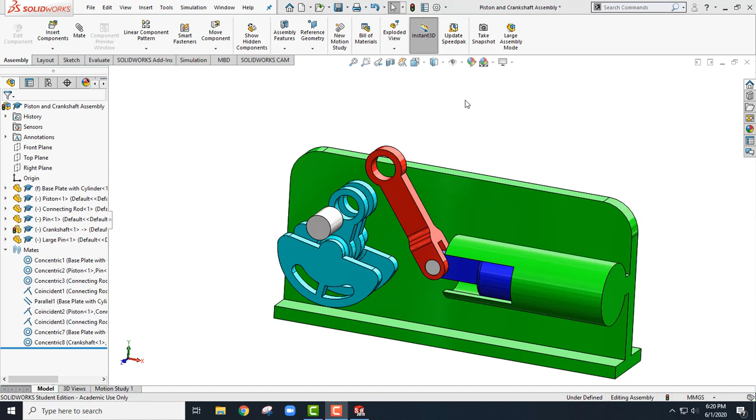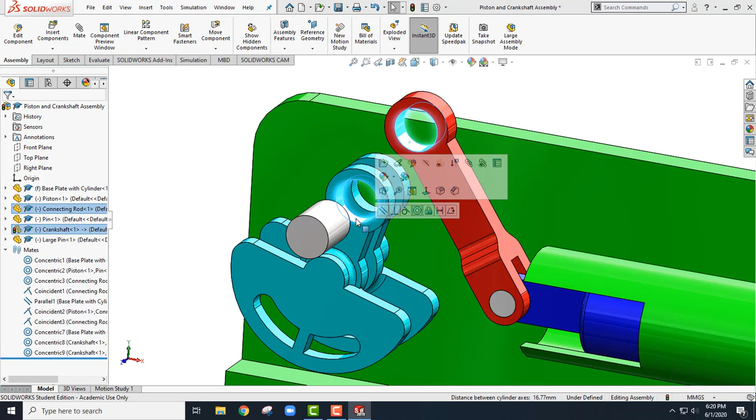First, when you're setting your mates up, don't forget that you're going to click on surfaces and then choose the surface. For example, here to make sure this is going to be concentric, make it concentric. Next, let me try this one here and this one, make these concentric. I click on this face and on this face and make these coincident. Okay, so that's set up.

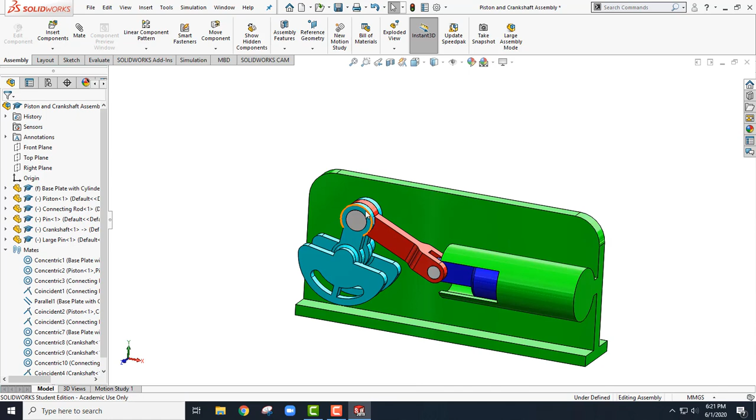And now this little part here works as a piston and crankshaft and connecting rod. So what if I want to have this be an exploded view? Now I have everything connected, it's moving the way I want it to, and I want to show an exploded view, which I'd like you to do. To do that, you create a set of steps to take it apart. Think about how it would come apart if you're going to take it apart. So click on exploded view first here, and then one thing at a time.

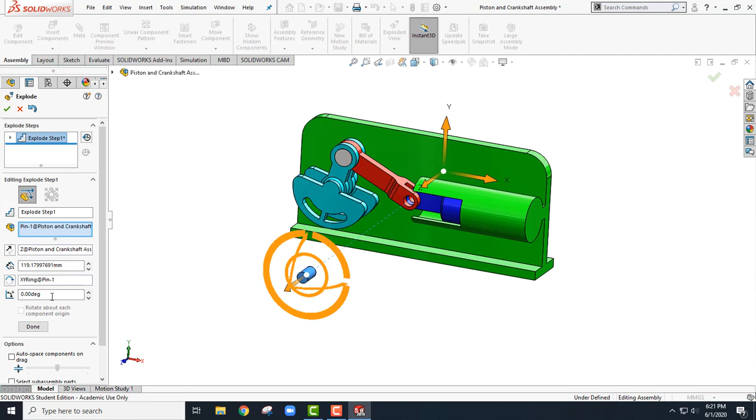If I was going to take this apart, I would take out the pins first. I'm going to click on this pin and pull it out to here. When you get it where you want it to be, just click on done. That's the first step, explode step 1. Next is this pin, I'll take this out to here. This is explode step 2, done.

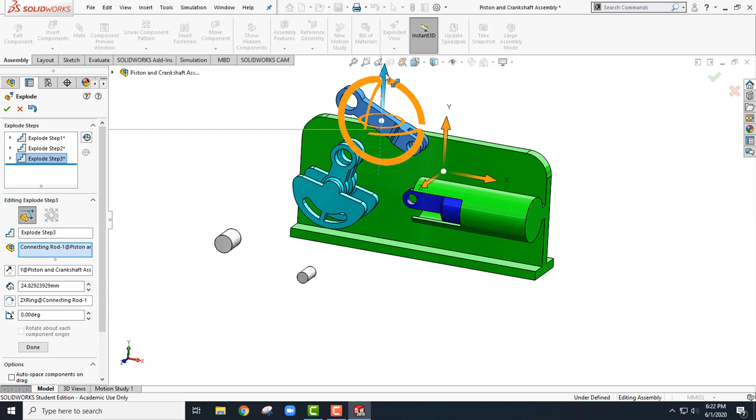And these are temporary movements, you're not doing this permanently. I would bring this up, probably click on this one and bring it up out of the way. A little higher, there it is, and that's done. I'm going to bring this one out this way to there, and that's done, and then pull out the piston.

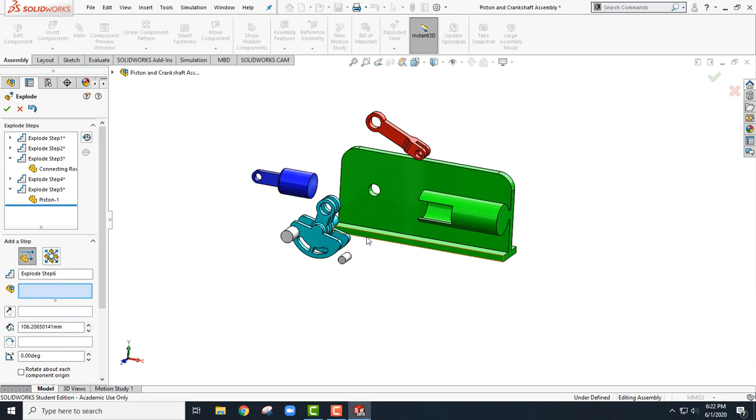Like this. Whoops, wrong one. I'm going to right click and delete that, click on this one instead and pull it out and see if that works. Okay, that's done. Alright, when that's finished, now I want to save this. If I click on exploded view again, it goes back to where it was, so don't worry about that.

But then you've saved the exploded view. So if you go to Configuration Manager here, notice that if you click on this arrow, there's exploded view 1. Right click on this and say Animate Explode. And now it shows the animation of what you've done.

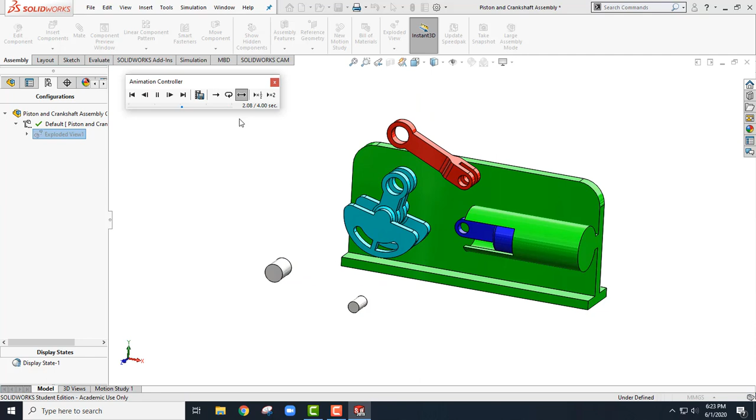Here's your animation controller. You can make it be in a playback loop, click on play and try things with this, and it'll just keep going through doing the motions. You can click on reciprocate so it goes reverse, back and forth. You can change the speed here by half or increase it by 2, things like that.

When you're ready, however you want to do it, I'm going to click on normal here and I'm going to record this now. Let me bring it back to here and I'm going to click on record.

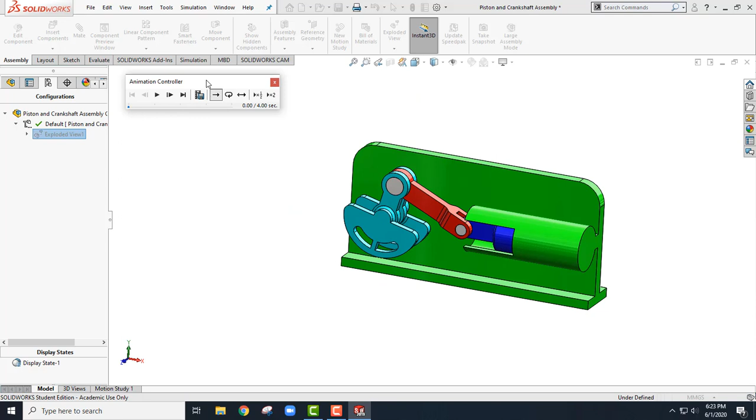So a few things about the recording: save it in a safe spot in your folder with the assembly. Don't use an AVI file, use an MP4 video file. That's what you would use for YouTube videos and just generally for your computer. That'll run on your PC at least. So use MP4, give it a name if you need to, and then save it, and it'll go through.

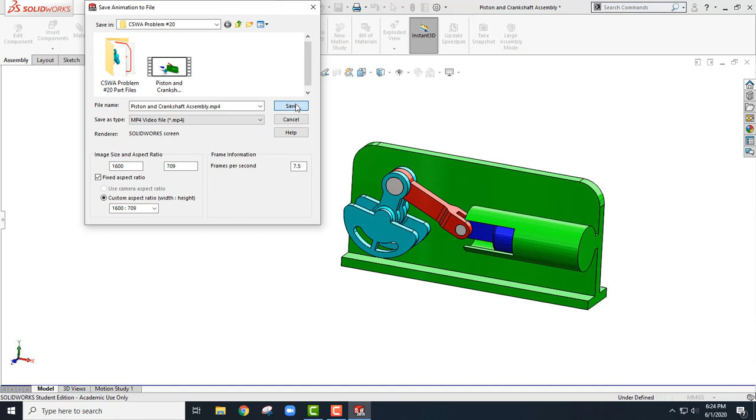And run the animation, and it'll save it. When you're finished, you can close that. Bring this back over, let me see if I can find it here. I'm just going to go to Quick Access. Okay, so I found it, here it is. I saved it right there. So this is the little video now of this animation.

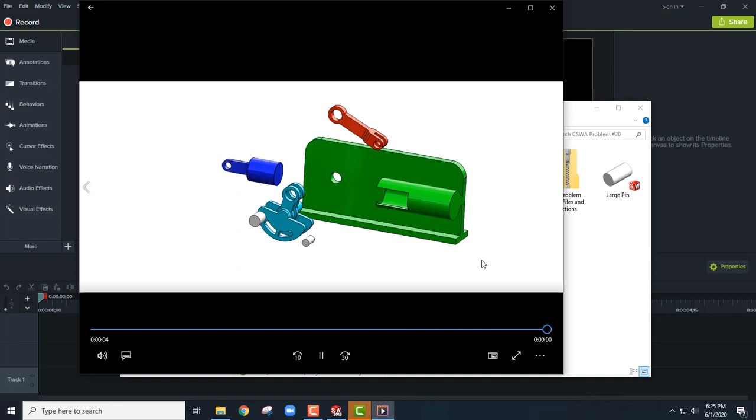It's a little not super exciting, but that's the idea. You can kind of play with that and use that. That's about it, hopefully this helps. You can go back to your regular modeling here, and again, this is the configuration manager that has that exploded view in it.